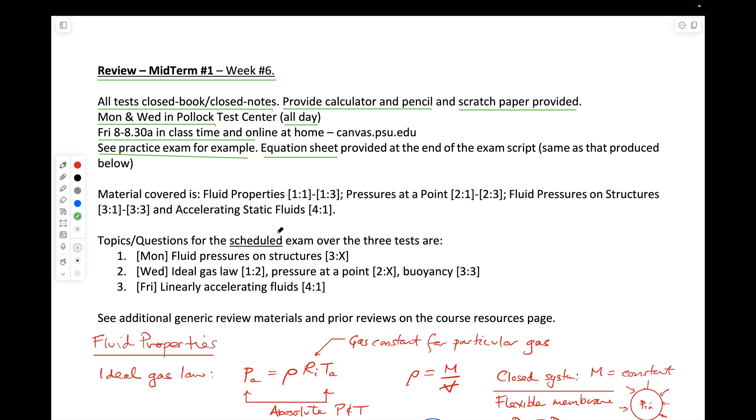In terms of the material covered, it's the first 3 and a bit weeks. We covered fluid properties in the first week, fluid pressures at a point in the second week, integrating those fluid pressures on structures in the third week, and the first period of the fourth week was dealing with accelerating fluid. That is the scope of the material.

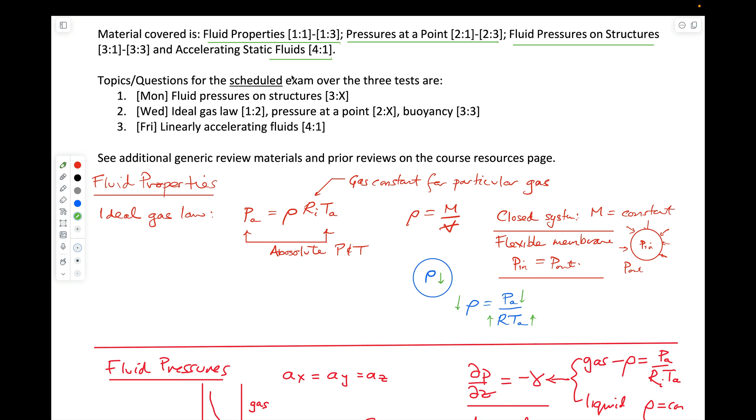The purpose of this review session is to clue you in at a more granular level on what the actual exam questions cover for Monday, Wednesday, and Friday. You need to take all 3 tests. Don't do as some students have done in the past and contact me at the time of the second exam saying, I didn't realize I had to take all 3, I just chose 1. That won't quite work. So take all 3.

The Monday test is on fluid pressures on structures and modes of failure. The second one on Wednesday includes ideal gas law, pressure at a point, and buoyancy. And the third one on the Friday is for a linearly accelerating fluid. So that at least gives you somewhere to look in your notes, to follow exactly what I will talk about here.

Maybe look at prior exams. If you look at prior exams, you can see that the review sessions hopefully cover everything you need for that exam. You can check that for yourself because you have the corresponding review sessions and the solutions to the exams. So I won't review the whole class, but I will review all the things that you should need for the individual midterms.

For fluid properties, you need to understand the ideal gas law. Pressure is equal to the product of density, the gas constant for whatever the gas is, and the temperature. The pressures and temperatures have to be absolute pressures and absolute temperatures, so be careful. The gas constant is a specific number for a specific gas, and if you need it, you'd be given it.

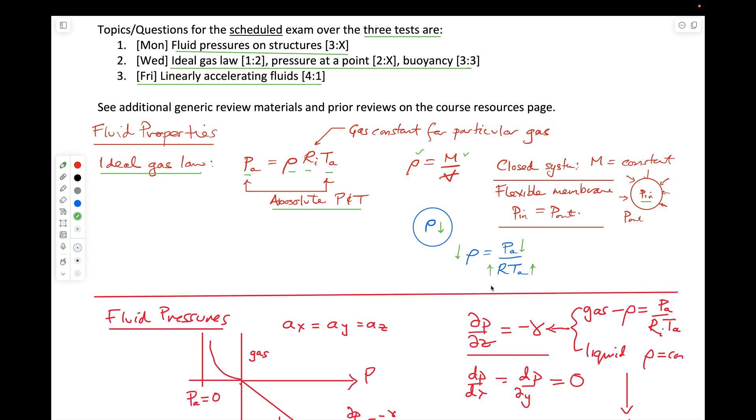So that's what you should need in terms of fluid properties. No viscosity, you don't need that this year, so you can count on that. Fluid pressures we defined in the second week. We developed some expressions for how pressure changes with elevation, which is that as you go up or down in a liquid, the pressure changes according to the unit weight of the fluid.

For an incompressible fluid like a liquid, the density and therefore unit weight is constant. And for gas, the density is a function of the ideal gas law and changes with pressure. And we have to integrate that into our understanding of it. So when we try and integrate pressures in the column, if we're in a gas, because the gas is compressible and is most dense at sea level and is least dense higher up, we have this nonlinear distribution. We happen to derive an equation for it.

And if you're in an incompressible fluid, a liquid, it varies with a constant value of this specific weight. And therefore, the rate of change of pressure with depth is a linear one. The rate of change is constant, and it gives a linear pressure trace with depth. And we can get that linear pressure trace just by integrating the equations and working from the pressure at the surface to get the pressure at any point we want, which is just equal to the depth of that point multiplied by the unit weight of the fluid.

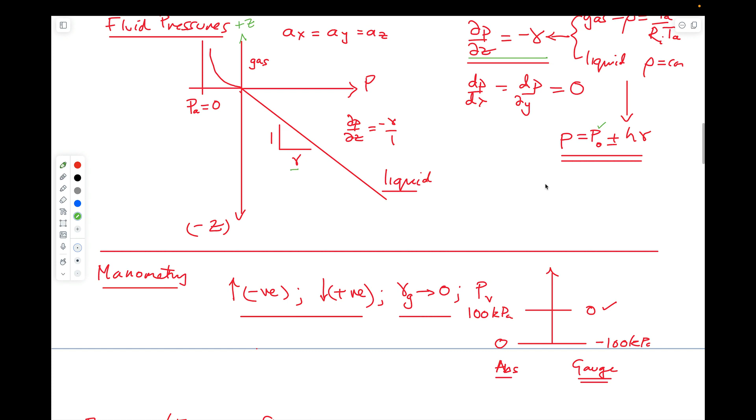We don't have manometry in this test, but you know the manometry rules. If you go up in a fluid, you subtract pressures. If you go down in a fluid, you add them. If you go up or down in a gas, the gas density is usually low compared to liquids in the measuring system, and so it's inconsequential. If you have a vapor in contact with its original liquid, then it's acting at the vapor pressure.

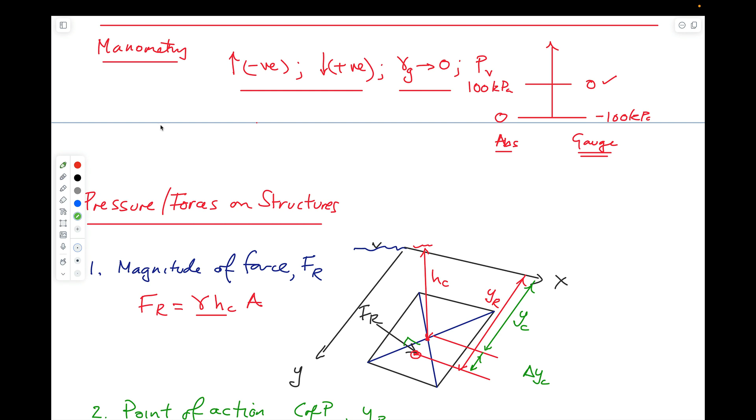And you define vapor pressure in terms of absolute pressures. So vapor pressure would be close to zero absolute or minus 100 kPa gauge pressure for something like mercury, which is a very low vapor pressure. But as I said, you actually don't need that. So that might ease your pain in all of this.

There will be something on pressures and forces acting on structures. And so we've talked about the three things that we want to do there. They're actually listed on this slide. We'd like to be able to calculate what the force is that's acting on the structure, the resultant force. It's always given by the unit weight of the fluid, the depth of the centroid, and the area on which that force acts. These two components here are just the average pressure. And multiplying the average pressure by the area gives the resultant force.

And the centroid is always the balance point, if you like, of the plate. This is for a planar structure, and it's the depth vertically from the surface down to that centroid. So we can always get the resultant force acting on that. The resultant always acts perpendicular to that plate, but it acts not at the centroid, but at the center of pressure. And the center of pressure is given by this slope distance down from the surface of the fluid. The distance we've called y sub r, and the location of that point is at some slope distance y sub r from the surface.

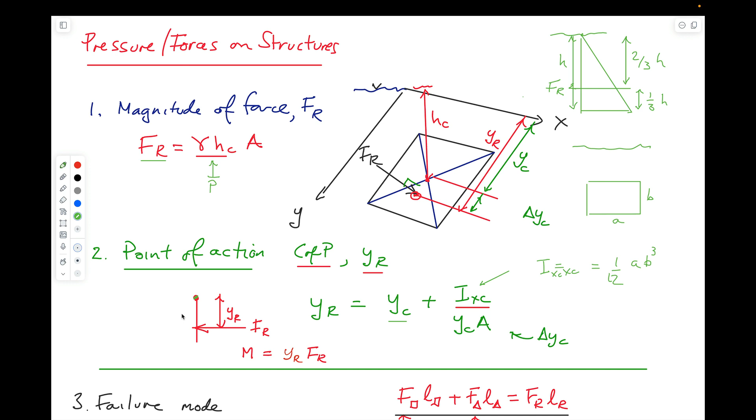So what you can do, we've done examples like this in class, where you have a distribution of pressures acting on a plate. That plate pivots. And so what you could do in this particular case is determine the magnitude of the force due to the rectangular distribution. Because it's a rectangular distribution, it has to act at mid-height of this distribution, and that would be the resultant for this area. And then the resultant for the triangular area would act at 1/3 of the height, 2/3 down from the top of it, 1/3 up from the bottom. And the magnitude of this force would be the area under the triangle.

If you wanted to calculate exactly where the resultant was working, you could choose to take moments around any position that you want. And here we're going to do this. And you could write this equilibrium equation in terms of the moments. So the force due to the prismatic distribution multiplied by its lever arm is this moment going clockwise. The force due to the triangular distribution times the lever arm is this force, again going clockwise. And that has to be countered by a force in the other direction, multiplied by some lever arm, which we don't know. Fr, we know, has to be equal to the sum of these other two.

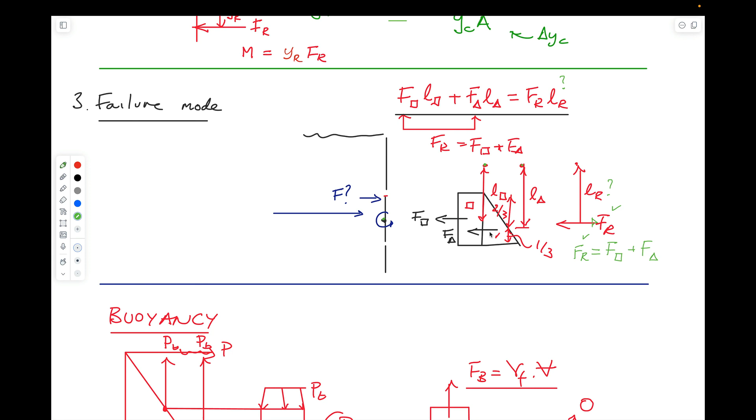And so we certainly know what this is. And the only unknown in this expression is this here. So we should be able to solve for that. So you can solve for this lever arm. So that would give you an ability to calculate exactly where the point of action is, but it's actually exactly the same as using this equation. My reason for introducing this is that often you want to be able to calculate how pressure distributions acting on structures would affect that structure.

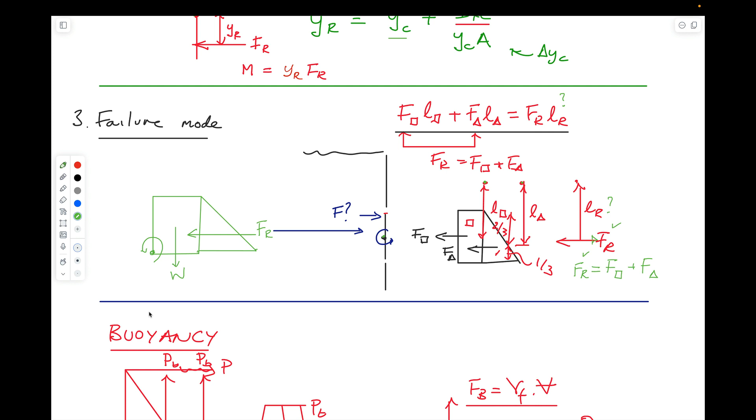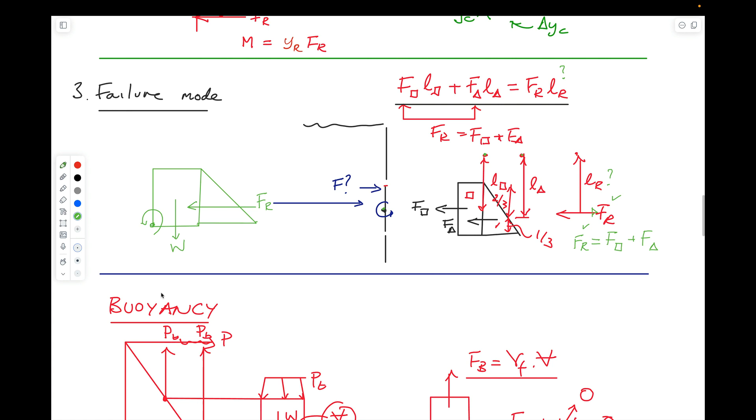And so if you have a pressure distribution acting on some kind of gate, then if you want to calculate exactly what this resultant is due to the pressure distribution, F sub r, and if you know that this dam to fail is going to rotate around this toe, then what you'd want to do is use the centroid or center of mass of this dam, to look at the weight of this dam acting against it. And we've done some questions in class related to that. And so you can also take moments about this to balance those. So that's a useful thing to remember and to understand.

Buoyancy, we explained in class, is always given by the fact that if you go down in a fluid, the pressures at depth are larger than shallower up. And that increase in pressure is exactly balanced by the unit weight of the fluid in the mass that's above it.

And that has to be true because this is an equilibrium, because F equals ma is being balanced. If you remove this weight of fluid, then all of a sudden this force acting upwards on this imaginary structure that you've taken the fluid out of has to be a bigger force than is acting downwards. And so the net buoyant force that comes from that is always given by the unit weight of the fluid that's surrounding this, that you've removed, multiplied by its volume. So it's always the unit weight of the fluid that's removed.

And so in this case, it would be the fluid that is surrounding this little bucket that we have in the subsurface. And that will always act through the center of buoyancy, which would be the centroid of this component. And it's always going to act upwards. It will always act against gravity, in the opposite direction from gravity. And so you can do a calculation.

If there's some weight of this structure that is acting downwards and the buoyant force is acting upwards, then you can do the balance between those. If you were true to the particular sign convention here, this would be weight acting downwards, which is minus, plus buoyant force acting upwards equals 0. And just from the sign convention, force upwards, weight downwards of this structure, and that would give you the result. Yeah.

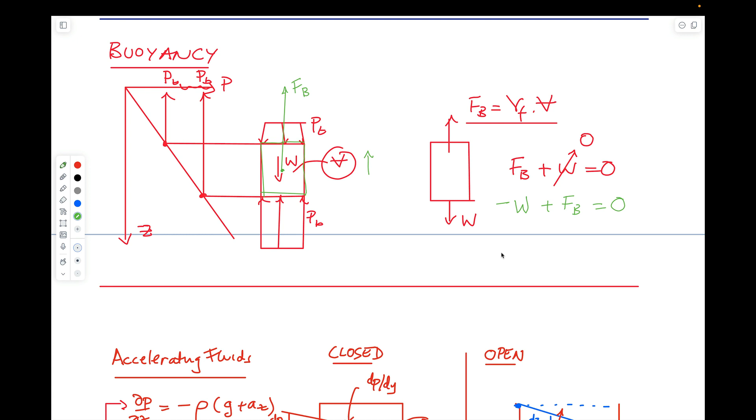Finally, the final component is to use accelerating fluids. And we can think of the expressions that we develop for accelerating fluids. If it's a closed system where it's moving horizontally at some acceleration ay, accelerations are always positive in the direction of the positive coordinate system, then it will try and rearrange its free surface. But if it's a closed system, it won't be able to do that. And what it will do is it will just change the pressure distribution as you go across the base.

And the pressure distribution that you get would be proportional to whichever direction you're going in. So if you're going across the bottom of this structure here, which is closed, the change in pressure as you go horizontally would be equal to the density times the acceleration. The acceleration is always a constant value, and so the rate of change of pressure would be just a linear distribution as you go across here, kind of shown here. If you were only accelerating horizontally and not accelerating upwards, then in that case this value of az would be 0, and so the pressure change with depth would just be the same as in a swimming pool, as if it was open. So that applies for a closed system.

If you apply it to an open system, say a tank in which the top is open, then what will happen is as you move to the right by accelerating in the y direction, you'll rearrange the surface and it will become inclined, and the inclination of this surface is given by this. The slope is just the vertical over the horizontal, dz/dy, and given by the horizontal acceleration in the y direction, again constant. And if there is an acceleration in the vertical direction, the addition of that onto gravity. Az is positive because it is positive upwards, as opposed to gravity, which we know acts downwards. So you have to be mindful of that.